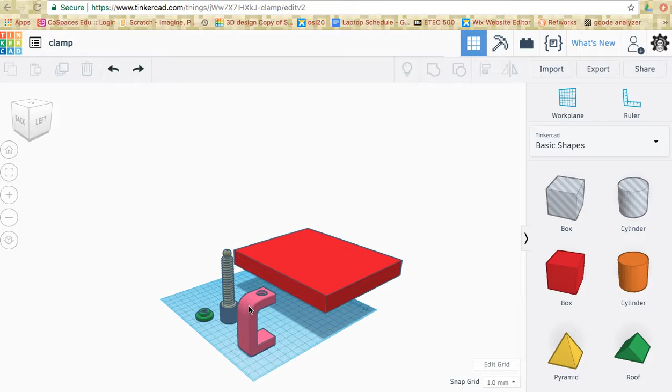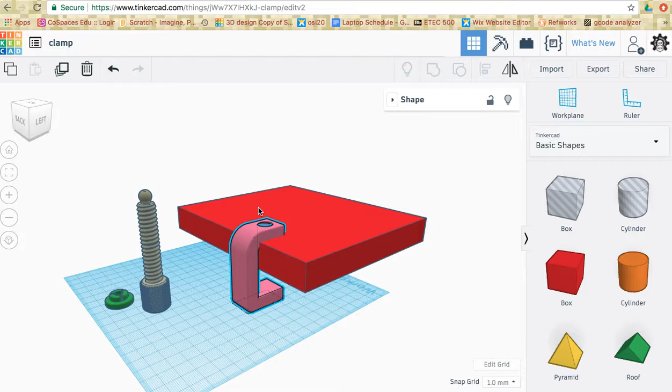The first thing you want to do is grab the holder piece right here and slide it over to your desk. This desk is measured at 20 millimeters high, but your desk could be whatever you've measured it at, so you might want to change that number. Then I'm going to slide this clamp piece up to the bottom so it's sitting flush on the bottom of my desk there.

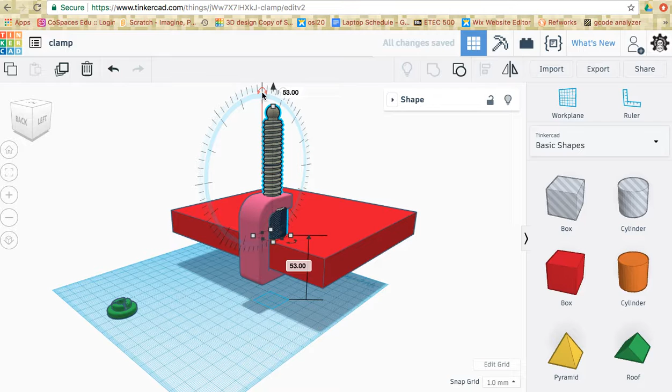Next I'm going to grab the screw piece here and slide it so it sits in the middle like that. I'm going to grab the black arrow, slide it up to get it in a nice low position, then click on this double arrow here and rotate it 180 degrees. There we go.

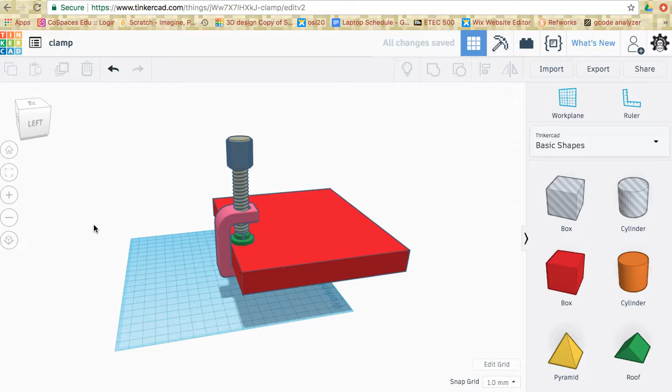Then I'm going to grab this little tiny green piece right here and bring that up. Now that's way off, you can see, so I always have to rotate it. I'm going to bring it to sit flush on the desk there. Now I might want to raise this up just a little bit.

Okay, let's check that out. If I move this, that's kind of sitting how it would, not exactly, but close enough. Now you can see the big problem we have here is this screw is way too long, so what we want to do is shorten that screw.

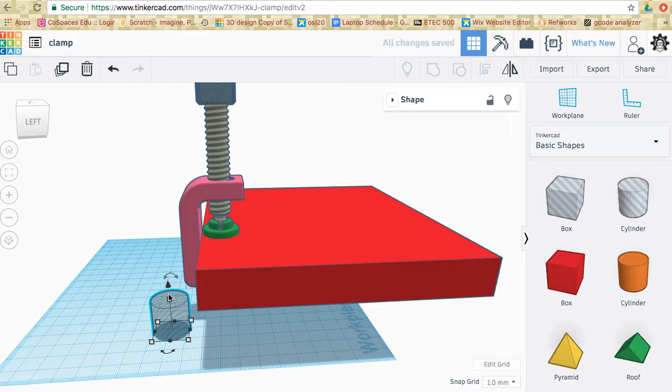To do that, just click on the hole cylinder here, bring it down somewhere on the bottom, and I'm going to rotate my view. I'll hold down Shift, click on the square in the corner, and make this bigger. I'm going to drag it underneath here and pull it up so it covers the screw. Let me get myself in a better position here.

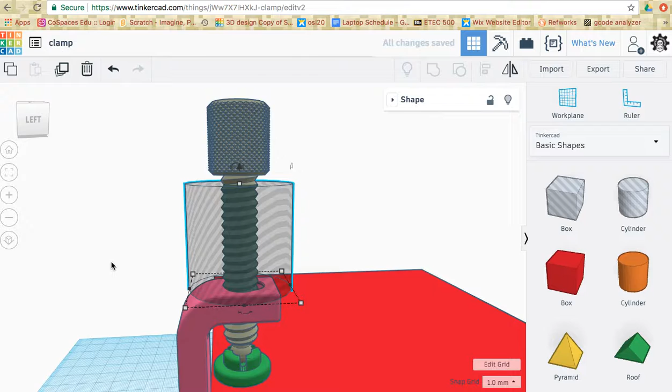I want to make sure it's sitting in the center there and it's touching pretty low, so I'm going to bring it up a tiny bit. Then I'm actually going to grab the top of it and extend it up to a point like maybe there, because this knob on the top is way too long. I want to shorten that.

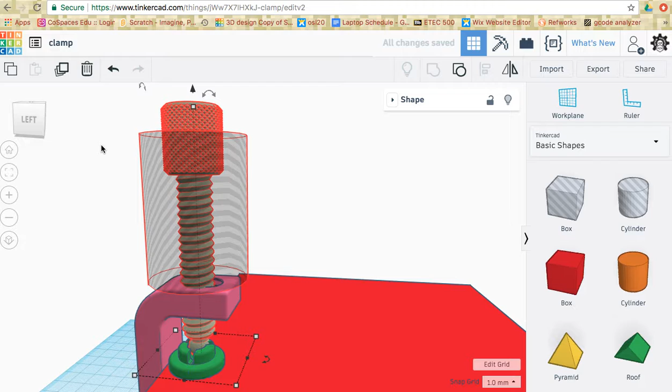So now I'm going to rotate to make sure it's covering everything. I'm going to highlight both pieces. If you're on a Chromebook, it's Control G; if you're on a Mac, it's Command G. I'm going to highlight both pieces again, hit Control or Command G, and that will erase the center and group those two pieces together.

Now what I need to do is get this top piece paired onto that bottom piece, and I can't do that directly. So I'm going to need to duplicate this piece. Just click on it, hit Command or Control D, and that will duplicate your piece.

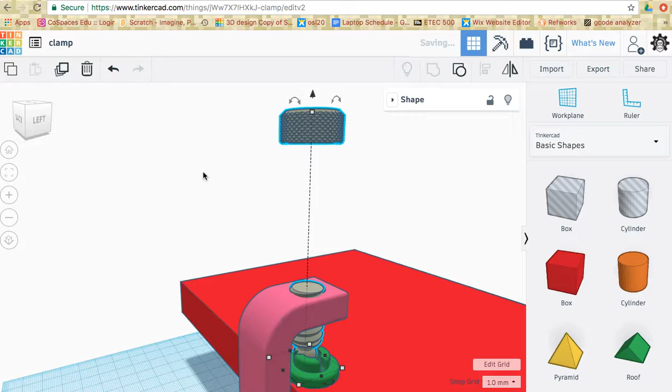I'm going to slide this duplicated piece out using the arrows on the side of my keyboard, so it's easy to slide back in when I need to line it up. Now I'm just going to grab another cylinder. Whoa, a little bit too far out there, I'm going to slide it in.

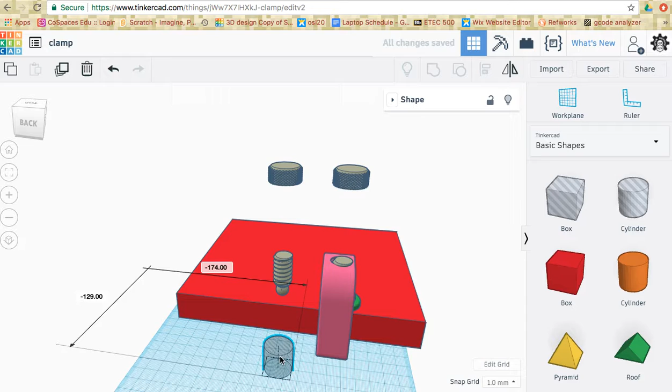Same thing, I'm going to make the cylinder a little bit bigger, bring it up and move in a little bit. I'm going to change my camera angle and erase this center piece. Now I'm going to drag this up just a little. Oops, I rotated that—drag this piece up just a little bit so it sits inside.

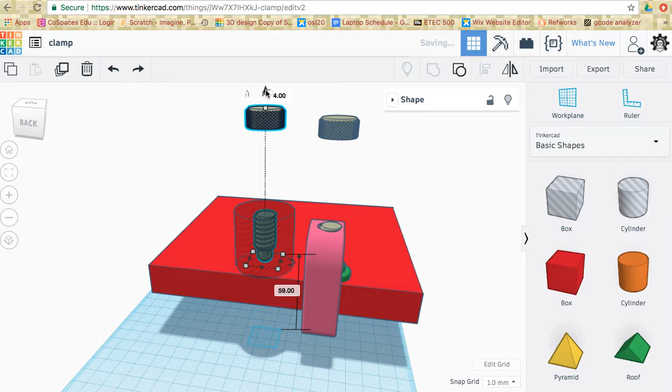What I'm actually going to do here is duplicate this cylinder so I can use it to erase another piece. I'll hit Command or Control D, that duplicates the cylinder—you see I've got another one's come out there. Then I'm going to bring it up to cover that other piece on the top there.

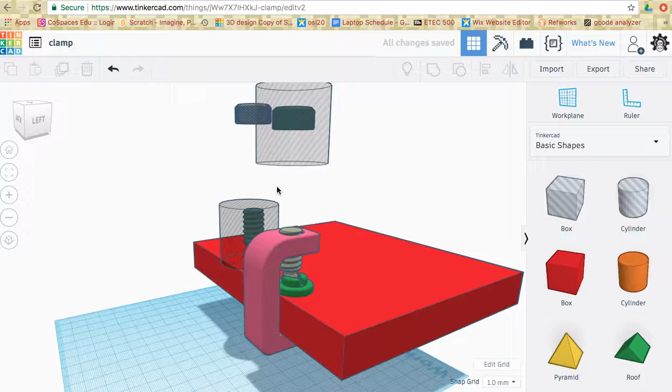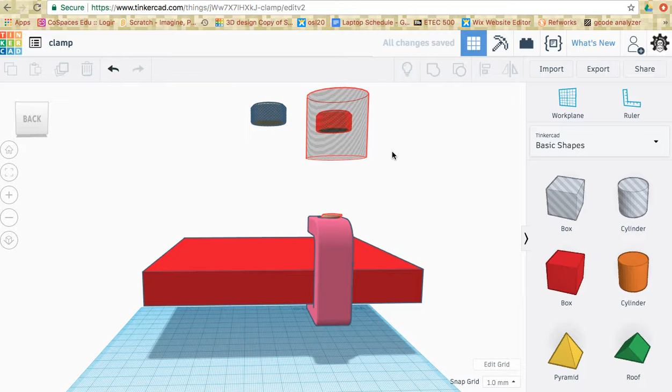Alright, we're going to erase this bottom piece right here first by highlighting both pieces, and hit Command or Control G, groups, and that will get rid of that bottom piece. Then up here I'm just going to highlight both pieces, hit Command or Control G, and that should get rid of that top piece right there.

Then I'm going to take my new piece right here and hit my arrow key to slide it back. It doesn't have to be exactly over top of it. I'm going to grab the little arrow on top, slide it right down, and I'll have to change my position here so I can see what's going on top of this piece.

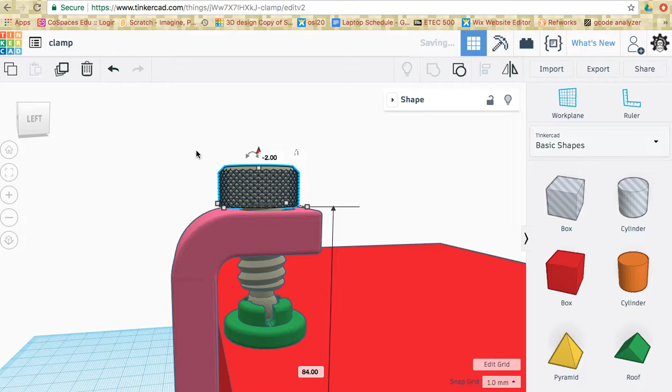Now you want to make sure it's sitting inside of it. What I'm going to actually do is go down to Edit Grid and turn my Snap Grid off. That way I can slide my piece more smoothly on top of it. You can see it's actually sitting inside of it.

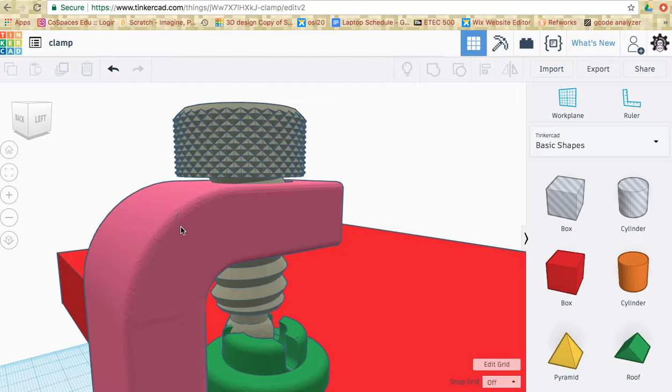Now to align this so it's perfect, what you want to do—and this is going to be a bit tricky—I'm actually going to move this piece out of the way here to get this right. I'm going to highlight these two pieces together and hit L on my keyboard. I'll try and change my position, just click the little black dot there and the little black dot there, and now this piece is sitting perfectly aligned in the middle from the top, the sides.

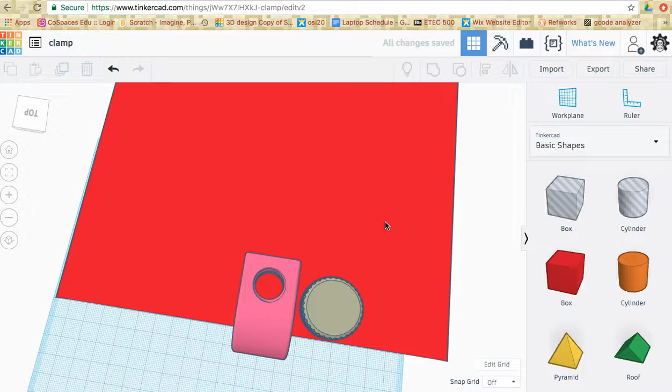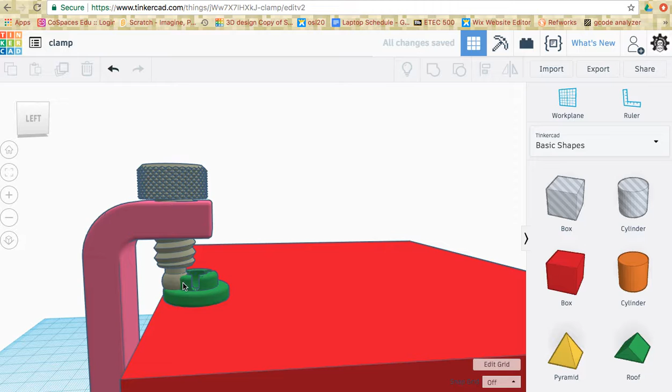Now you're going to highlight both these pieces again and hit Command G, and that groups it, and now you should have—if this worked correctly—a nice short little piece there, which will fit perfectly with your desk clamp. There we go. You can line it up and see how it looks. All right.